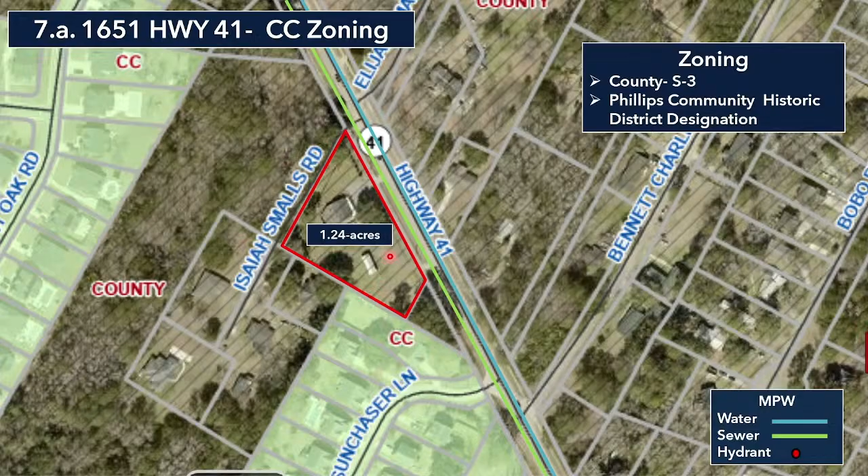So the site is fully hooked up to water and sewer as of today, and it is in the county, zoned S3. Furthermore, it's in the Phillips Community Historic District designation.

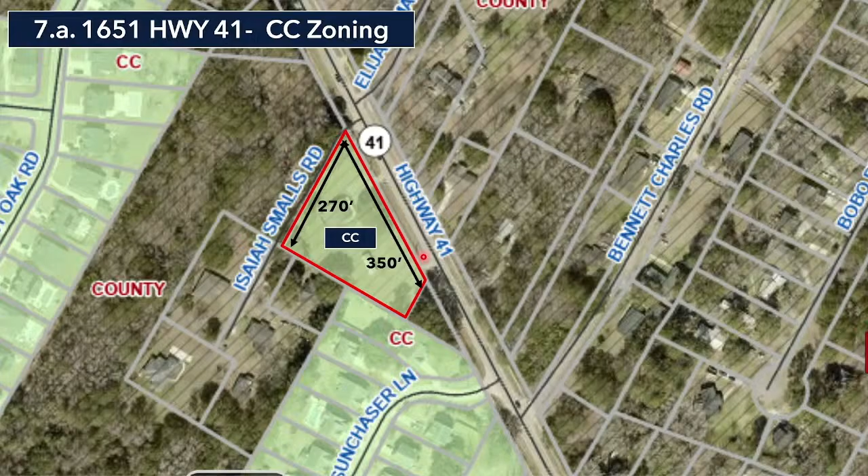So the request is to annex and zone into the town as CC, Community Conservation, which, as you know, would be very similar to the county's version of S3. So that is the request for zoning. Annexation will be taken up by committee and council, but for zoning, I'm glad to answer any questions you might have.

Questions at this time for Mr. Stone? We've talked about these rezoning requests a number of times over the last few months, so it sounds like this one's similar.

Quick question. I believe I checked into this, and I think there's currently an HVAC business or something operating out of this residence. Is that public knowledge, or is that a guess? I believe that in speaking with the county, that has been a code enforcement issue that they have had to address. Okay, thank you. Okay, this is a public hearing, so if there's anyone here to speak on this matter.

Yes, my name is Richard Habersham. I'm the president of the Phillips Community Association at 2938 Bennett Charles Road. At the last meeting, y'all didn't advertise this thing because the notice was put out at, I think, about 12 o'clock the same day y'all had the meeting, and we didn't have a chance to see anything at the last meeting.

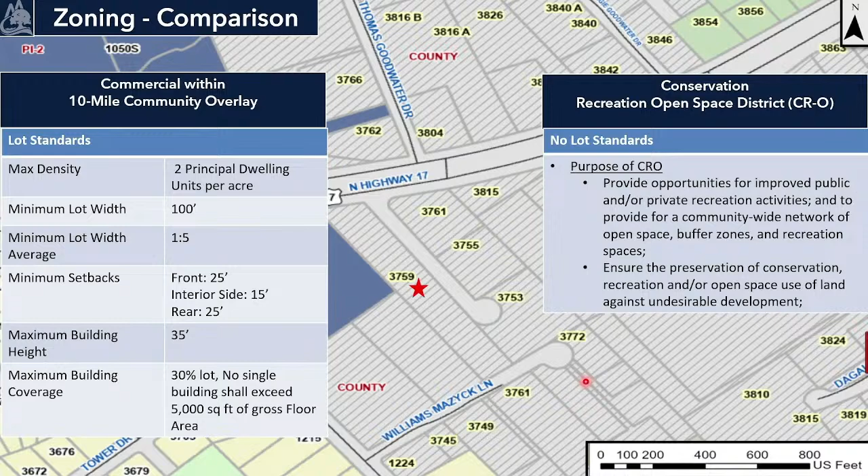So it's important to understand the purpose of this zoning district: to provide improved public, private recreation activities, and providing a community-wide network of open space, buffer zones, recreation spaces, and also to ensure the preservation of conservation, recreation, and open space. So that is the request before you today, and if you have any questions, I'm happy to answer them.

Questions for staff? Anybody? Ms. Arlen, you know the code, or the comprehensive plan better than anyone I'm familiar with. What do you think? I guess what I would say, it's settlement community, but to my knowledge we don't have any opposition by anyone from 10 Mile unless people are here to speak about that tonight.

So I'm inclined not to worry too much about it if there's not been any, because it's generally open space, a campground. One of the things that was interesting to me, though, about the request is how there's a good bit of road frontage there. It's really narrow, for the most part. So then I was asking myself, well, what use really could be made of the property?

As most of you know, I'm usually a rural advocate for open space and recreational space because it's really precious in our community as it's grown over the years. But anyway, this parcel in itself, the way it's laid out, is fairly narrow by comparison to some of the other parcels. So I didn't know whether that's a factor in our decision making or not.

But anyway, we should probably have a public hearing. Yeah, we will. Any questions for staff? I guess I had a question. You had mentioned there would be a review process for someone who wanted to make this a campground.

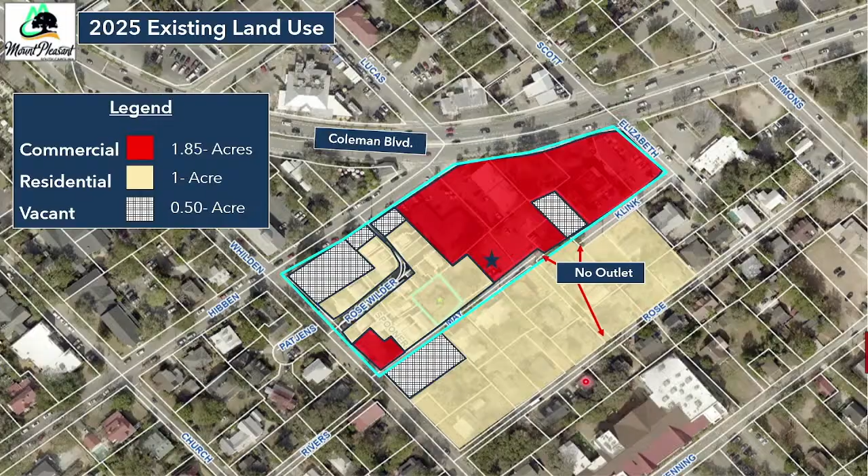So the similarities here too with 106 May Lane, that was currently an existing residential use. As you can see in the GIS image, there's a house there. This one, as you can tell, is vacant. That's the big difference there. And also I put up there the square footage. So 106 May, you're about 0.14 acres. This one's a little smaller, about 0.11 acres.

So you can tell, and I highlighted on the left side, the Coleman Boulevard overlay district, specific to the village scale pedestrian standards. Basically what their setbacks are going to be, a 20-foot setback off May Lane. You would also have parking requirements that would make it difficult to develop this as a commercial property without aggregating it into one of the neighboring properties. And that is the request before you tonight. I believe the applicant is here to speak towards it.

Yes, sir. Okay, but before, please come on up, sir. Are there questions for staff before the applicant speaks? I have one, just to refresh my memory. What's 106 zoned as? Is it R1 or R2? R2. Thank you. Yes, sir.

If you would, state your name for the record and address. Sure. My name's John Rice, and my address is 2147 Parkway Drive in Charleston. I'm the applicant, and from hearing the residents' concerns, I would echo their sentiment of not wanting to develop more commercial on that street, and that's the direction we're wanting to go. So changing the use to residential would be in line with their sentiment. And the intent, I suppose, is to build a home. That's correct. Yes. Okay, gotcha.

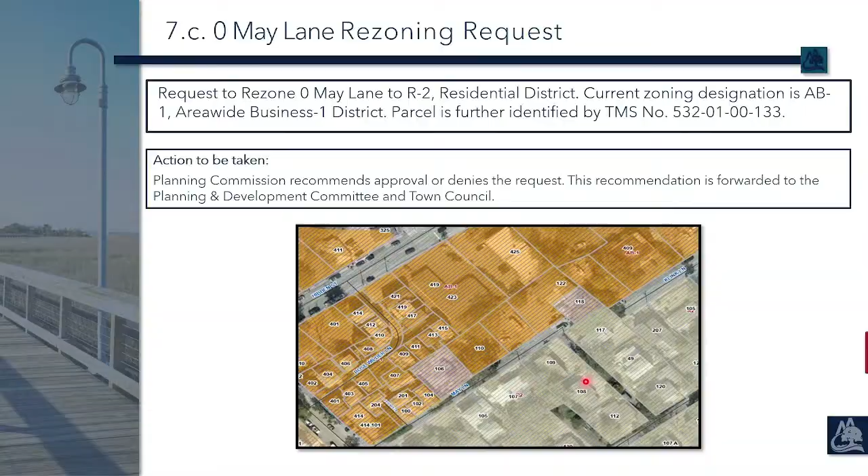Okay, any other questions for staff or discussion? It seems to me the residents are okay if we rezone this for a single-family home. There's other allowed uses on the principal use table, but it'd be consistent with R2, like the community residence we talked about before, amenity buildings, but basically what you're seeing in R2 district is detached house dwelling, and I believe that's what the applicant is proposing. Given the modest size of this particular lot, those other possible uses are impractical. They're just not going to happen. I was just curious, okay.

One more question for staff. For everybody in the audience, can you remind us the pervious versus impervious area of that residential lot, being roughly under 5,000 square feet? What's the percentage of density of the home? For the impervious surface coverage, if it was exactly 5,000 feet, about 2,000 impervious surface coverage is going to be the limit, and that counts driveways, everything water cannot penetrate. So 40% of the lot would be buildable in essence.

Yes sir, okay, that's a great point. So just a great scale for the audience, if you're not following along, the largest home that could be constructed on this property would be 1,800, 1,900 square feet per floor. It's very, very modest in size. The footprint would be very modest in size.

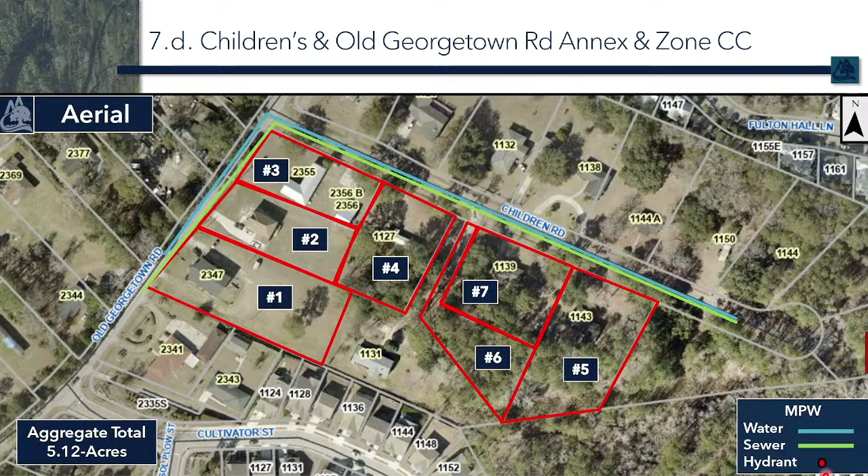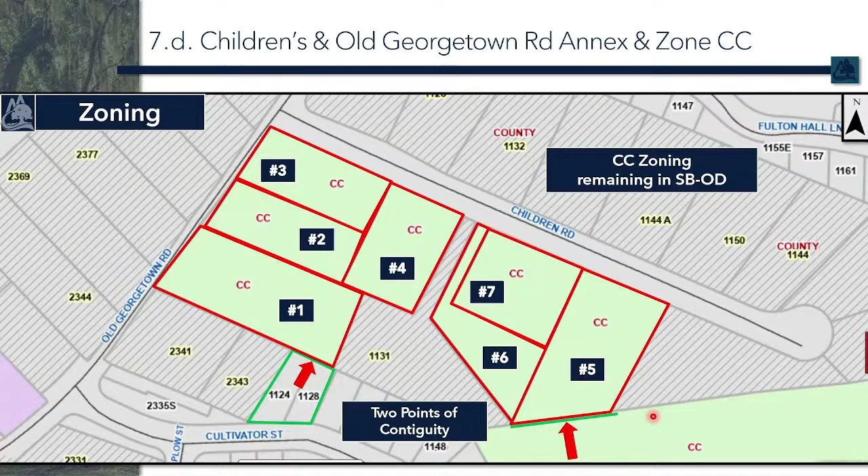Thank you, Mr. Chair. This is a request on 7 parcels, either on Children Road or Old Georgetown Road, and in aggregate we're talking about 5.12 acres. The applicant has made it clear that water and sewer is readily available, and they would like to annex in order to connect into that water and sewer. The important thing to note is that this is in the county right now, zoned S3, and it straddles the 6 mile, 7 mile boundary, but does not have a historic designation on it. So qualitatively, it is a like-for-like exchange. I understand the first agenda item, the distinction made there, but qualitatively, this is a like-for-like CC to S3 exchange. So this would be requesting CC zoning and remaining in the Sweetgrass Basket Overlay District for these 7 parcels. I did want to point out the contiguity, because that is important. The reason this is one big agenda item is because these parcels are contiguous to one another. Number 1 gives you connectivity to 2, 3, 4. Number 5, that's your point of contiguity to 6 and 7. So this is being handled as you couldn't annex in number 3 without having 1 and 2 first. This is kind of an all-or-nothing vote. So that is the request before you for these 7 parcels, and the applicant is not here, they're currently at work, but okay.

Mr. German, sir. All right, great. You're doing a fine job.

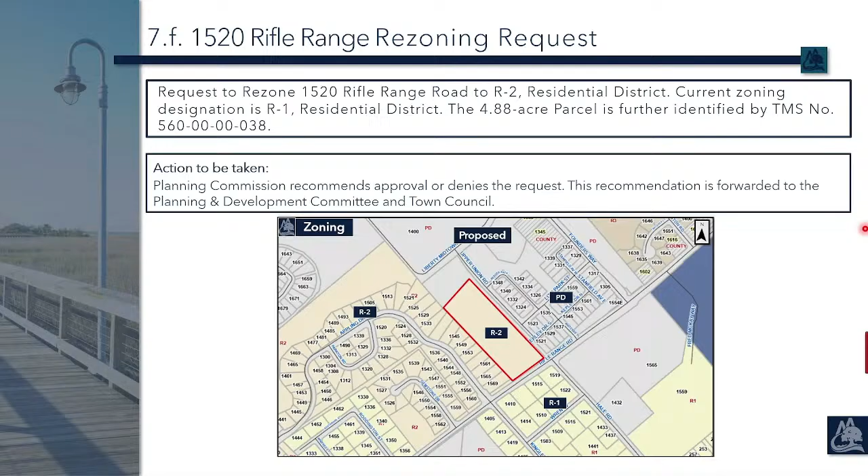Is the applicant here? Yes, sir. If you would state your name and address for the record. Thank you. I'm Stuart Whiteside, Seaman Whiteside and Associates, address 618 Hopgold Bluff Drive in Mount Pleasant.

I'm here representing Mark and Parker Smith, who are the owners of the facility. They own a 4.8 acre tract, and they are looking to relocate in Mount Pleasant to a more modern facility. They've kind of outgrown or outpaced themselves at the current location. The property they're in now is completely surrounded by single-family uses. The R2 they're requesting is basically the same as next door, which is Shell Point, and it's actually less dense than next door on the other side, which is Central Mount Pleasant. Most of the properties on the north side of Rifle Range Road are R2, R3, or PD.

The proposed subdivision they'd like to do is a 14-lot subdivision for family members for several of the lots, and then to sell a few of the other lots that are left over. It will be less than 3 units per acre. It'll be similar to Gemstone Drive, which is a block or two down the road, if you're familiar with that.

Due to the width of the property, we are looking for R2 because R1 has lot depth requirements of 110 feet. Especially as you get down to the end of the road for the subdivision, you have lot depth problems, and it's difficult to get a lot on both sides of the road when you get to the end of the cul-de-sac. It also gives us some flexibility, because there are a few trees on there we'd like to work around. R2 would give us more flexibility in lot sizes and shapes to work with that.

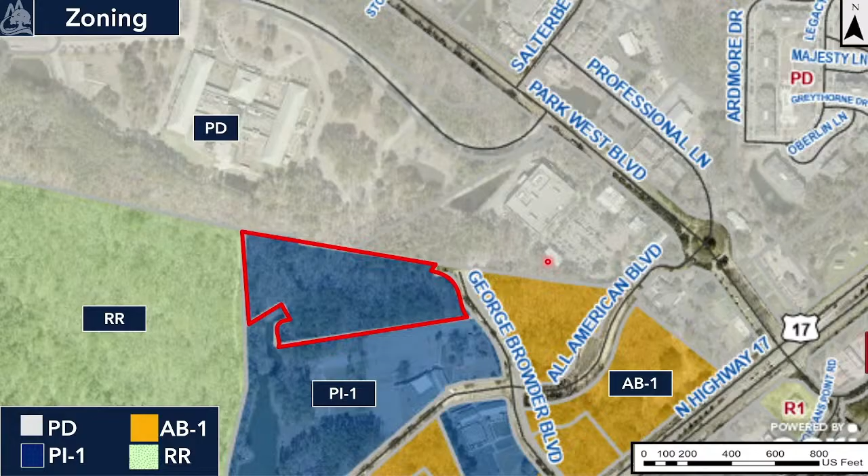Thank you, Mr. Chair. This is a request to amend the Dunes West PD by incorporating a 7-acre parcel into the Park West development. You can see on one side you have Laurel Hill County Park, Laurel Hill Primary, and Life Park Church, and then the commercial shopping center at Park West. The property is zoned PI1, public institution number 1 district. Previously this entire campus was under a planned development containing the church's master plan intent, but vision changes over time, and they've scaled back and are now looking to sell this property. The future land use is consistent with the current zoning, so community facilities.

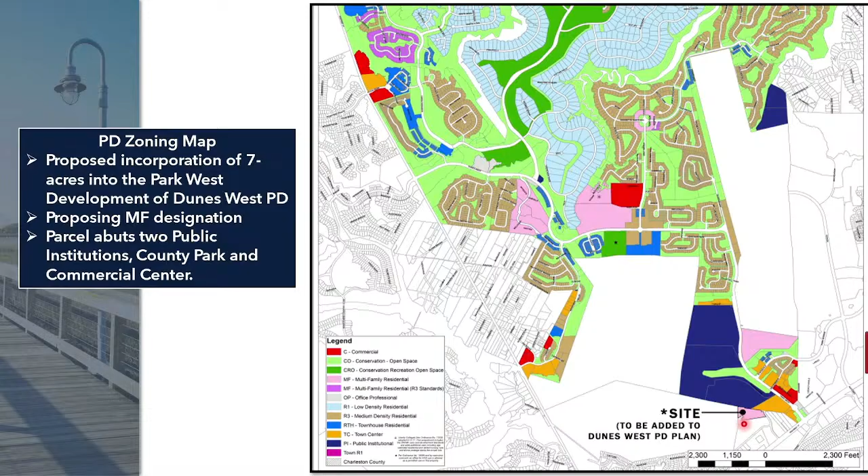The PD zoning map for Dunes West shows this parcel on the very bottom to be included as the 7 acres, proposed to be designated as multifamily. This parcel is abutted by two institutions, one being a church, one being a county park and public school, and is within walking distance of the commercial shopping center.

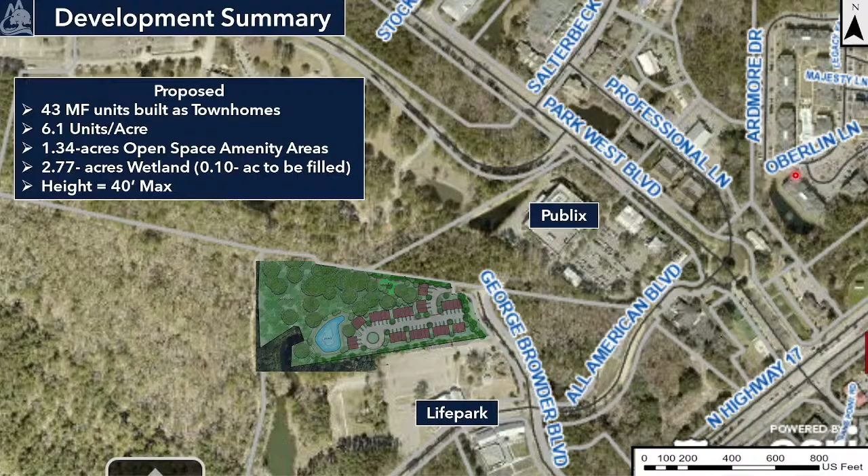As far as the development summary, they're proposing 43 multifamily units to be built as townhome style. Overall, with the 7-acre site, we're looking at 6.1 units per acre. They are creating 1.34 acres of open space amenity areas, and 2.77 acres of wetlands will be preserved. They will be filling in 0.10 acres as part of this development plan, and the max height is 40 feet. So one thing to bring up with this planned development...

Back in 1990, Dunes West was established, and in '96 they partnered with Park West, and at that point assigned and allocated units for each separate development to pull from. The basket that the Park West development is pulling from has 50 multifamily units left. With this proposed 43 multifamily units, that would leave 7 remaining if this were approved. So that's something to make you aware of, and that is the request before you. Glad to answer any questions, and the applicant is here as well.

Okay, any questions immediately for staff? Yeah, I have one. Do you have an aerial showing what the trees look like on that property?

It's not real clear, I'm not really sure what I'm looking at here. Well, he's got the drawing too that shows trees. Are there any mature trees on the property? There are, and it is a heavily wooded site. And what's the expectation for all that? I mean, we have the tree committee, and I'm a tree hugger here, so I'm always concerned about the trees.

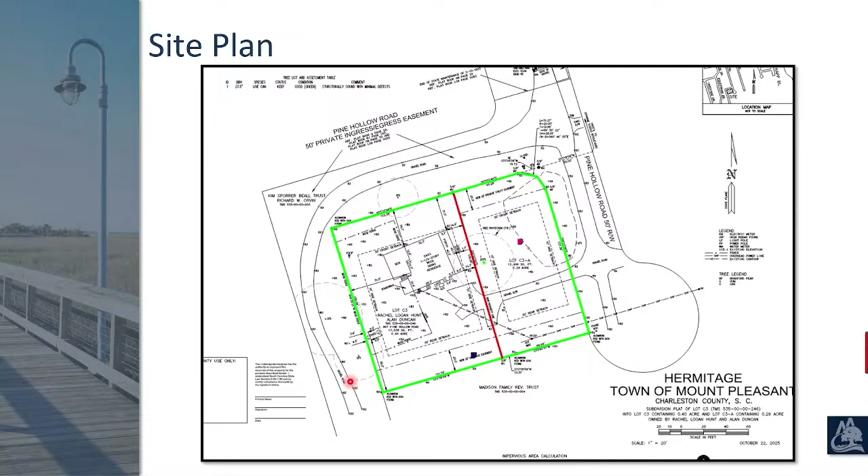Yeah, and I'm a little confused. There's a whole bunch of consent letters. Was that? These are from 35 years ago, that relate to the subdivision of that 980 property you were talking about. That has really nothing to do with this though, right? Not at this point.

Joe Kessinger also wrote an opinion about that, and that statement was requested at the time, asking to subdivide the original 980 into 4 lots, and they got approval from neighbors. But since then, it's already been approved. All those properties have already been sold, but the bottom line is, since that letter was written, it's already been subdivided, already approved for subdivision into 7 parcels. So we're just asking for 1 more, which would be number 8 from the original 980.

I was just confused as to why these things were even relevant to you. It just popped up because those people don't even exist anymore. They're probably all sold. We just submitted what was asked for at the time, and the question came up, and it doesn't seem to be an obstacle as far as the attorneys or staff at this point are concerned, from what I can tell.

One more question: does Pine Hollow, which connects these other lots, connect to Cavalry Circle? It does not. Cavalry Circle terminates at a cul-de-sac, and then you'd walk as far as from here to the dais to get from Pine Hollow Road. So only by foot, they do not connect? Only by foot. Right, only by foot.

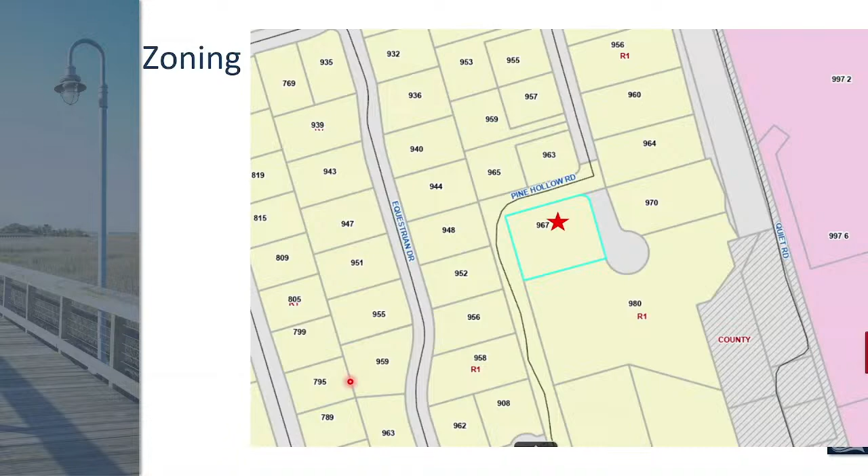Can we go back to the bigger picture, Peter? Can you go back to the bigger neighborhood picture? Yes. So 959 and 965 are the lots that I mentioned that already granted an LDR waiver request apparently. So there's precedent there.

Could I ask you again, why are you not having driveways come into each of the 2 lots proposed to be subdivided from that northern easement, so that it's not one going through the other? Maybe just inertia, because of the way we've always accessed the lot, but I have talked to the potential buyers about this, and we're open to accessing it from anywhere on the lot. We were just trying to keep it kind of the way it is, if possible. So we're willing to live with either configuration. You're not sitting here saying you know exactly where these future driveways will go yet. You don't know technically where they'll go, you're just trying to subdivide at this point. Right. Our preference would be to go out on the southern border of 967, but if that's considered not desirable by the commission, we're perfectly amenable to accessing straight out to Pine Hollow, on the north side of the lot.

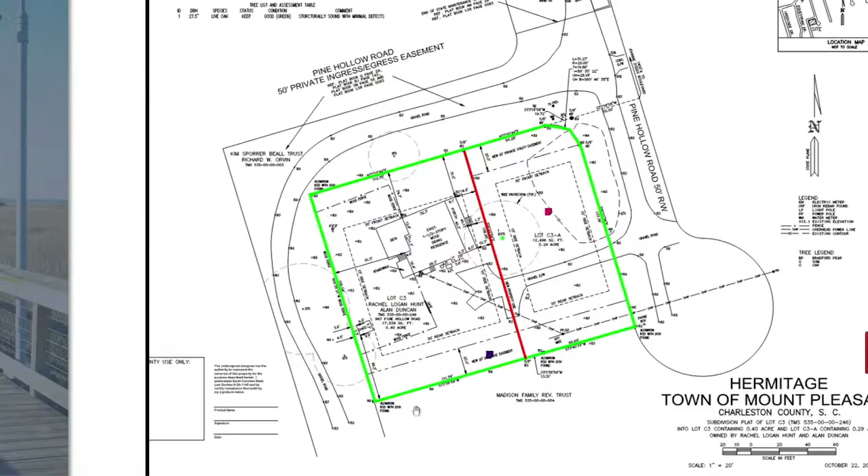Sorry for the confusion, I did not catch that until he was describing his access. Okay, I don't mind taking a swing at it. Is there more for the applicant before we move on, Mr. Farrar? Thank you, sir. So this is sketch plans, no public hearing. Are there questions for staff beyond what we've already asked?

I believe I know the answer to this, but are we allowed to put some conditions on this?

Just as a point, I think anybody that would own lot C3A would want to have, whether it be a side load or a front entry drive off either Pine Hollow, that should be good for them, and likely they would want that. And I think the existing home should have a driveway off the 50-foot private egress easement above, but not come through C3A, because that would be odd. So I would make a motion to approve the request with the condition that lot C3 have access from the Pine Hollow Road 50-foot private egress easement as labeled, north facing on the plan.

I'll second that. I like that as a solution. People have heard me say in the past, and I think there's some general agreement, I'm not a flag lot person, whether it's a true flag lot or some variation of that. But what Mr. Farrar's proposed, I think, addresses that through that private easement.

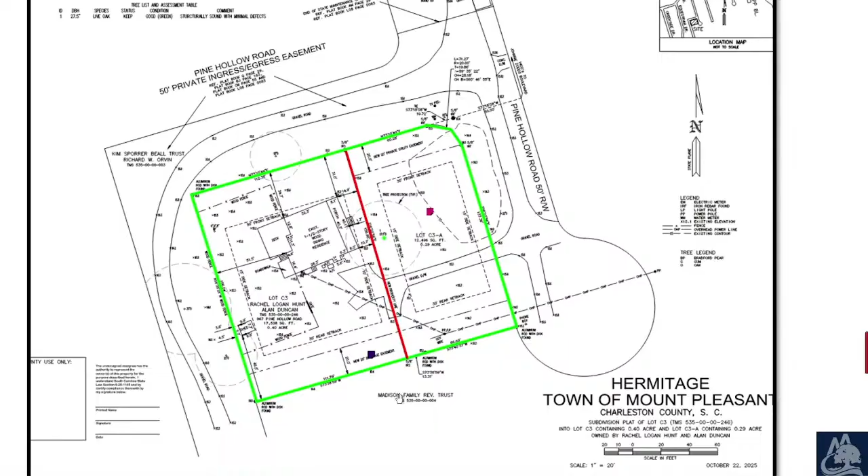Item 7J, sketch plan, in this case for Ida Road. Wow. They have to put this together.

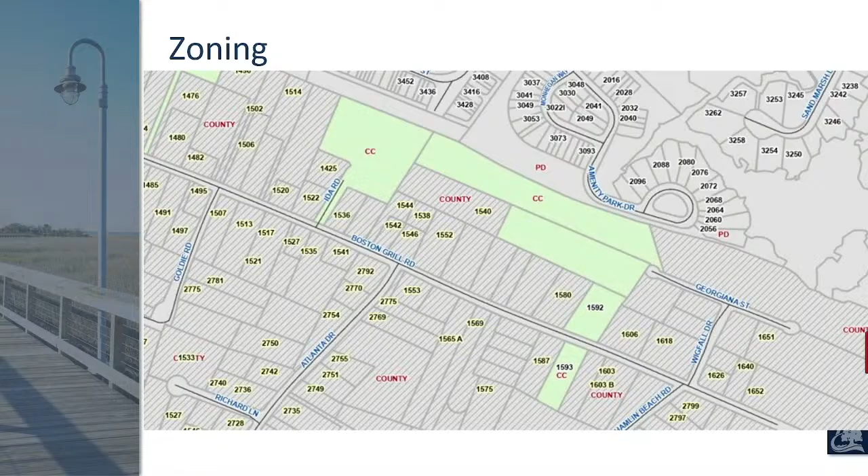So it's currently zoned CC and is surrounded by county parcels. Future land use is settlement community.

So this is the site plan: 17 single-family lots, 3 HOA lots. The green shaded area is the green space they had to provide per the green space preservation plan, which is 20% of the total lot. We have a slide on that later as well. This is going to be a public road, and there is a type A buffer surrounding the perimeter of the property. There are currently no trees proposed for removal.

Proposal is to aggregate 3 lots and subdivide into 17 single-family lots and 3 HOA lots. CC zoning requirements are a minimum of 12,500 square feet, with dimensional requirements of 80 feet width by 110-foot depth. A 10-foot type A buffer is required around the perimeter of the site. Applicant is required to plant 637.2 inches to meet the tree requirements. They are currently not proposing to remove any significant or historic trees. They are meeting the green space preservation plan requirements with 2.29 acres of undisturbed green space, and the stormwater management plan is conceptual and will be coordinated with staff engineers.

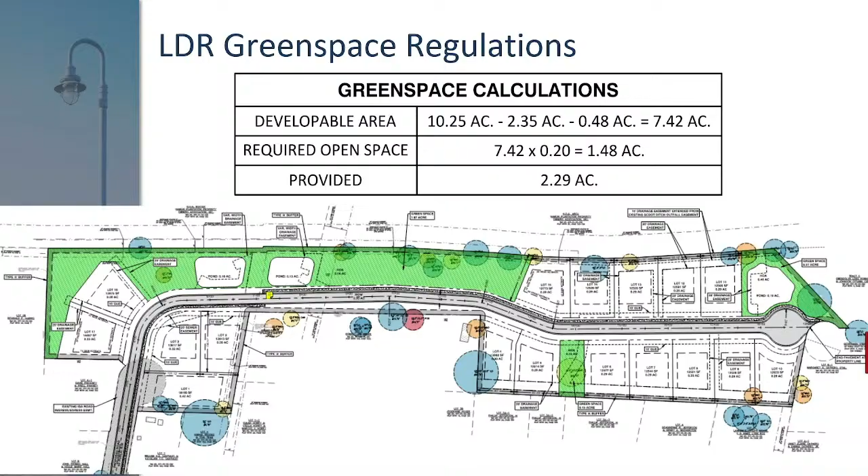LDR maximum road length for cul-de-sacs or low density subdivisions is 1,000 feet. This project proposes to create a 1,900 linear foot roadway with a connection to another public right-of-way, which is currently unimproved, and that is Georgiana Street that you see right here.

Staff comments from DRT review: provide upstream drainage analysis for the proposed culvert sizing. Staff recommends some type of traffic calming along the straightaway segment of the road, possibly a raised table crossing for the pedestrian crossing. Applicant is to provide all necessary stormwater permitting prior to the start of the project. Full technical review of the stormwater plans will be coordinated with staff in future DRT submittals. Mount Pleasant Waterworks proof of coordination letter has been issued, and the tree requirements, which I mentioned earlier, require them to plant 637.2 inches to meet the 160 inch per acre requirement.

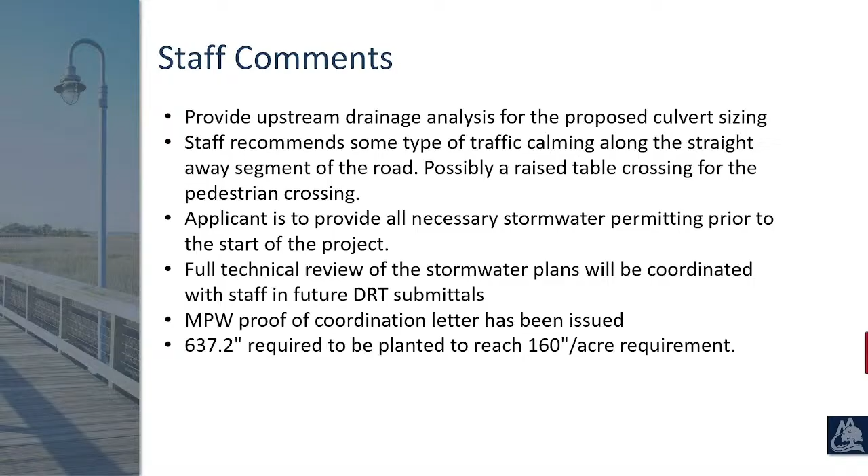So I will go back to the site plan. The applicant is here if you have any questions for them, and I'm also here for questions.

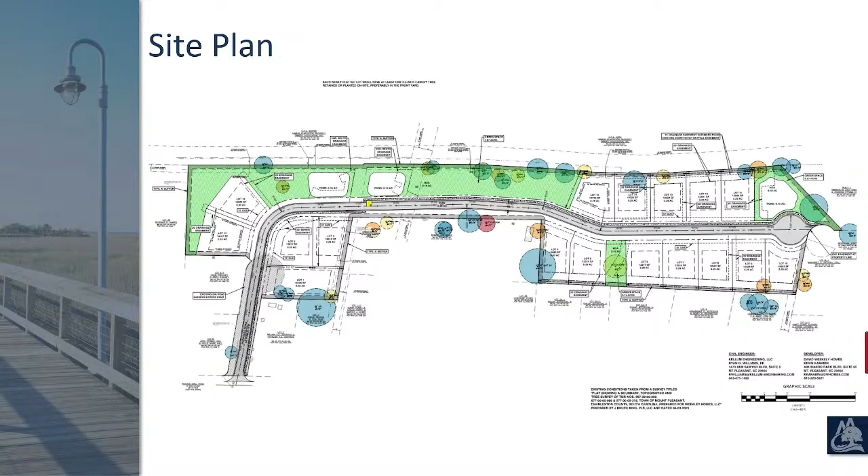My name is Ryan Williams, I'm with Kellum Engineering, and our business address is 1470 Ben Sawyer. Kevin Carabin, my address is 618 Leisure Lane. Vic Brandt, 1509 Galloway Lane, Charleston, South Carolina.

So as was stated, there are 3 existing parcels we're combining and subdividing into 17 single-family lots. We've extensively worked on the layout to try to preserve all of the grand trees, and we've met with town staff more than once to go over this. I think we've come up with a pretty well thought out layout for this property. We are exceeding the open space we're required to have, and I think it will be a great use for the property. Any questions, we're here to answer.

Questions for the applicant? I have a question. So I'm a little confused. If you're not taking down any trees, but you want to replant like 600 trees, there seems to be a conflict there. Can you explain that to me?

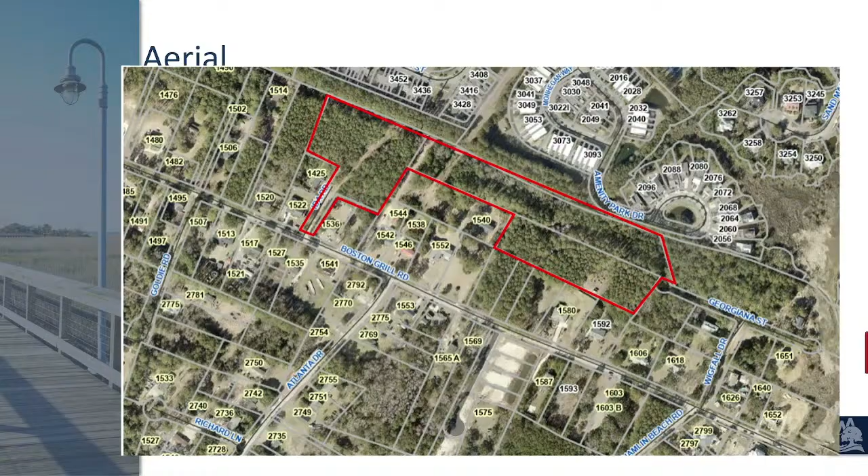Yes. Okay, so normally under the land development regulations, LDR, the Commission has the discretion to grant a waiver of some of the LDR requirements if one is requested. I don't see a waiver included in this packet.

There was coordination with our transportation department because they are setting up for a future connection. It's temporarily a dead end, but because they're providing that connection, the LDR waiver would not apply to this situation. And who is providing the connection, the state or the developer? The developer is providing that connection for whenever the state decides to improve Georgiana Street.

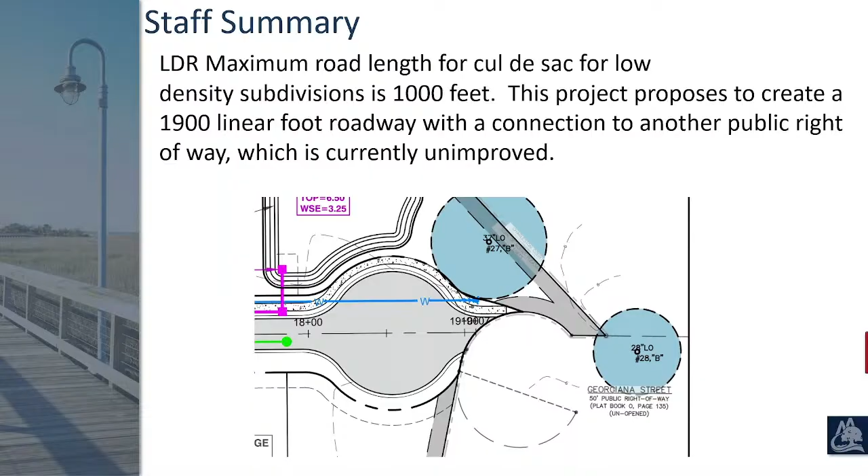So okay, there's no problem in terms of safety or getting vehicles through or access? No, we will be meeting fire code for turnaround, fire access for turnaround at the end with the cul-de-sac, and for other safety means for the long road, as they stated, we'll be having traffic calming measures

midway through the subdivision. Do you have a sense as to when that connectivity would be established with that state road or Georgiana Street? No, we don't. Okay.

But your plan provides the open door, green light for that to happen when they're ready. Yep, that's correct. I just said their plan provides full access cross through when the state's ready. The door's open for that. Mr. Fair, that's exactly why they're not asking for a waiver, because they are making that right-of-way connection. So in theory, they really don't have a cul-de-sac because they're connecting right-of-way with public right-of-way.

We don't have that condition in our LDRs. It actually has to be connected with an approved right-of-way, but there will be, and we have the ability to have access all the way through to prevent that from being a dead-end street. So that's the reason why it's not a waiver. They are making that connection with another public right-of-way, so in theory it is not a dead-end street. That's in theory, but we just never know if that will ever be connected. That is true, or improved.

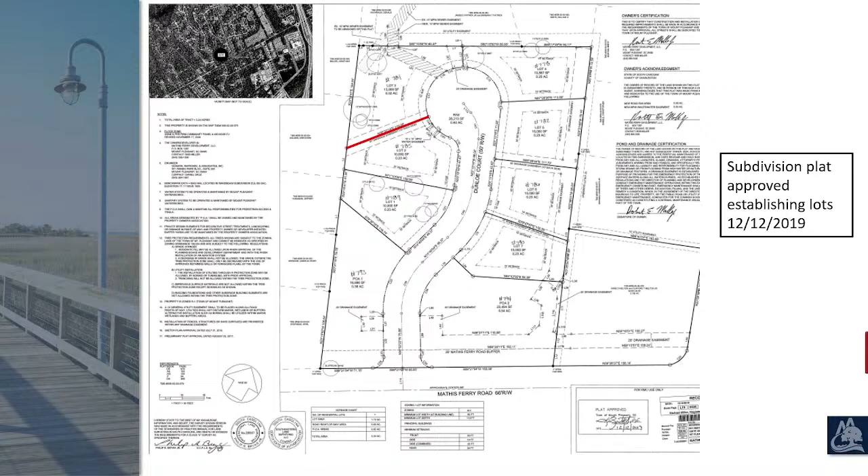All of these lots were platted in 2019, so just reiterating that this is a property line adjustment, not a subdivision. The reason for this property line adjustment is to relocate the drainage easement and drainage pipe. The red line is the line to be abandoned along with the drainage easement, and the green line is where the property line will be added with the drainage easement on each side. The drainage pipe will run down the middle of that.

So it's really here before you tonight because of the tree removals and encroachment. They are proposing to remove a 17-inch live oak in fair condition and a 19-inch live oak in poor condition, and will be encroaching into a 40-inch hickory tree. They have provided a tree preservation plan, which I can show more detail of if you would like. Staff comments: they have provided the tree preservation plan for the encroachment into the 40-inch hickory tree, and they are to pay or plant 13.25 inches of tree mitigation prior to final plat approval.

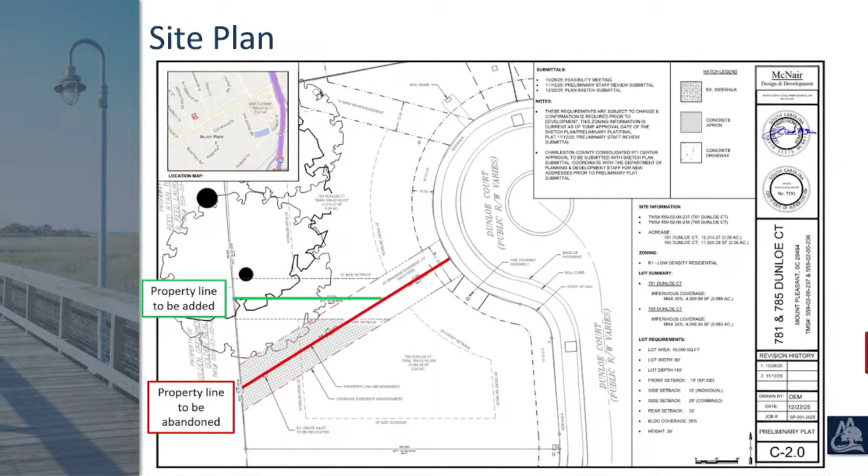So again, what's triggering this is the need for improved drainage. Is that what I'm hearing? Correct.

I guess I don't really understand that. Maybe the applicant's going to come talk, but my assumption was it was to make that southern lot more buildable. Yes, so if you see the dotted line, that's where they're proposing to put the house or building pad, and currently the pipe and drainage easement are running through that, so they need to relocate it over to the side.

I'm confused, where's the building pad you're talking about? I see like a setback dotted line. Aren't those just the setback lines? Oh yep, sorry, yes correct. So this is all for that, but it's affecting a tree that's not otherwise affected if the line stays as is. Can you go into more detail about the preservation plan for the tree, please?

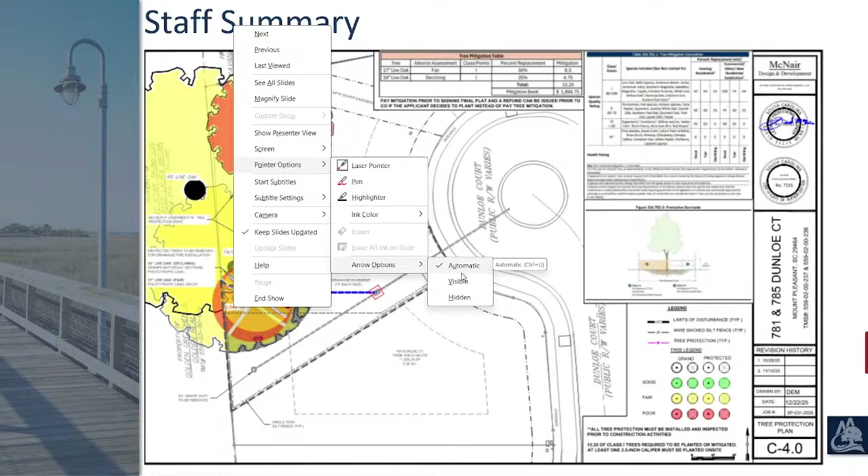I don't know why it's not showing up, I had it in there. But basically, the applicant can speak to it more, but there will be root exploration that goes along where the drainage pipe will be installed.

So if I'm interpreting correctly, it's still feasible to build as the lot line exists. It just means that structure would be a more modest size to work within that drainage easement, right? I can refer to the applicant as to their needs exactly.

Okay, if you want, yeah come on up sir. If you would introduce yourself by name and address. Davis McNair, 1206 Pleasant Pines Road.

To address that question, the rear yard setbacks on that lot 785 really kind of restrict the potential footprint of that building. So the idea was to adjust the current lot line to just create a little more buildable of a lot.

The 19-inch live oak is declining and in poor health. The 17-inch is being shadowed by the canopy of the 40-inch hickory. There is an option we could explore if it gets a little more approval where we could shift that drainage easement to the right, to have less encroachment on that hickory tree as well as that 17-inch live oak. That would be an alternative approach, but all of this is to create 785 as more of a buildable lot.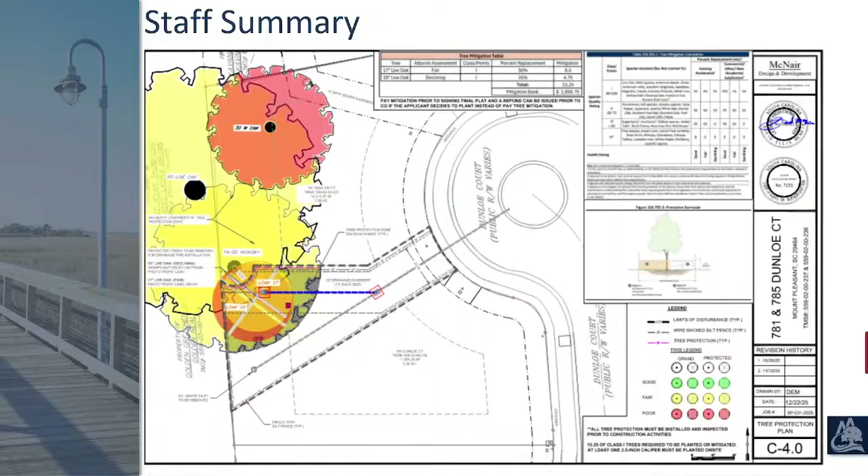Yeah, okay, so sorry to use my pen here, but currently that pipe is running at this angle, and you've got it shown now running left to right. If you kind of split the difference, does that help? Does that make sense? So putting it more in the middle.

It does, every little bit helps. Yeah, every little bit helps, of course. I still think you're looking at encroachments, maybe less encroachments or impacts. It sounds like the 19-inch live oak is in very rough shape, so where I was going with that is if you kind of split the difference in what you're asking for, and the live oak indeed is likely going anyway, then that still may accomplish what your goal is.

Preserve the 17, yes, preserving the 17 hickory. I think you get the house you're looking for potentially. I'm not sure, but you can't put a house on top of the drainage pipe, of course, but that's underground, right? It's not going to stop you from putting grass there and plants and trees and everything else. So just something to consider.

Has any of the other lots on this cul-de-sac been built? They have on the opposite side of the street and the property south of 785, or the bottom lot. I'm just wondering how you're going to build on the lot to the north. Like that almost. 781, I think he's talking about. Yeah, it's like the one to the north. Kicking the can down the road, it seems like.

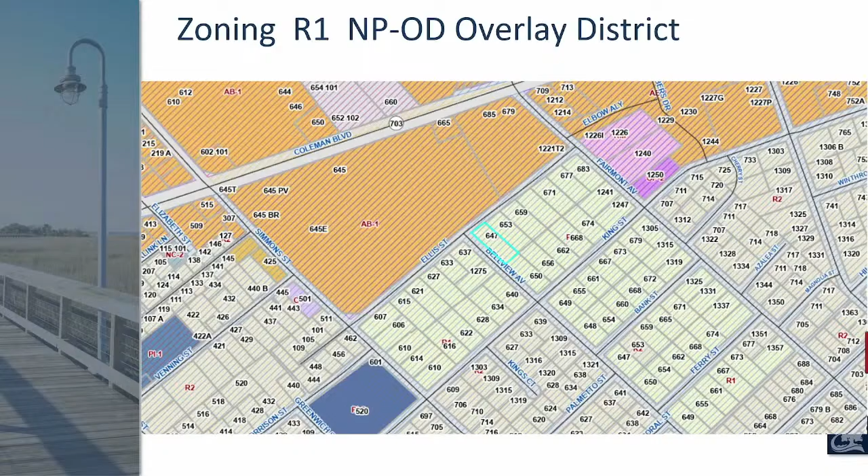As far as the consistency, R1 is still there. Future land use is residential, and that's fairly consistent as well.

Staff summary: aggregating two lots, creating three. R1, 10,000 square foot. The lot is proposed to front Bellview Avenue. The applicant is requesting a waiver to not meet the dimensional ratio of the land development regulations, which is the lot being wider than it is deep.

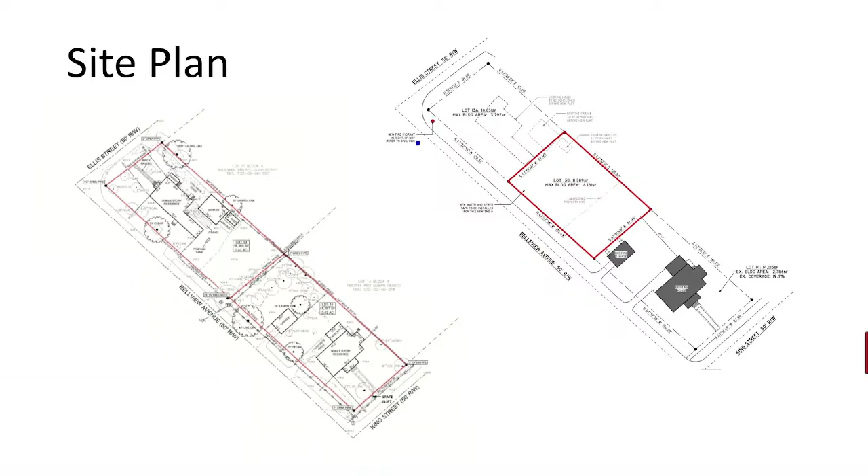Okay, sorry. I'm the applicant. The way that we determined where the property line would subdivide the existing Ellis Street site with the Bellview was we went to the edge of the tree protection zone of that grove of trees, and then basically split the difference between that and the corner.

So it's not three necessarily equal lots - the central lot is larger. The Bellview lot would be larger than the Ellis Street lot, to try to shift as much as possible away from the trees. We laid out building area before we submitted any of this, just to make sure we could construct a house clear of all tree protection zones within that lot.

Thank you. As I said earlier, I appreciate all the sensitivities, and there's logic - I think this parcel could sustain the additional home. I just think, since we're deviating from the development pattern in that immediate area, that's where I have real reservations, and I have a hard time supporting the proposal. But I'm one vote.

So, he's the applicant - are you the applicant or the property owner? Okay, yes sir, go ahead.

I'm Andrew Hunter, and I live at 906 Royal Avenue in the old Mount Pleasant. I apologize for my voice. So right across the street on Bellview, it's already been done where they split the 2 lots into 3 lots. So when you're saying it doesn't fit the character, you've already kind of set a precedent where that was allowed to be done. Literally straight across the street from that middle lot is the house that's already happened.